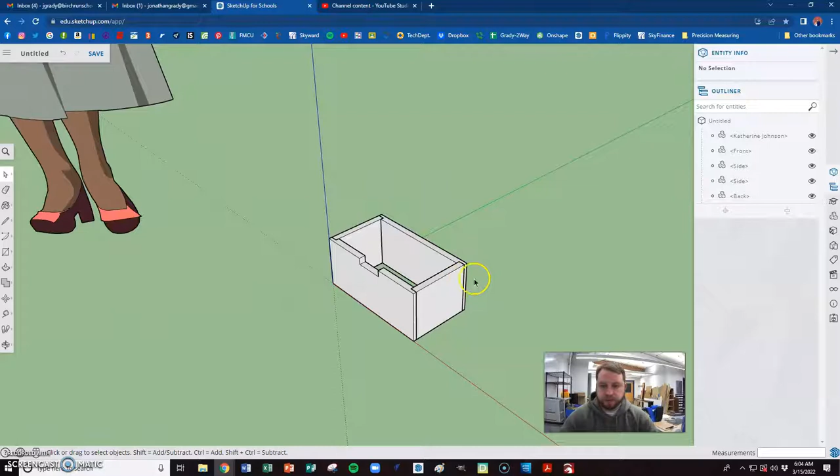Okay, we're back now, and here we're going to make the changes to the bottom. So we're back here with this drawing. If we go back, I lost my diagram, take a look at our diagram here. We're making the rabbet in the bottom of this.

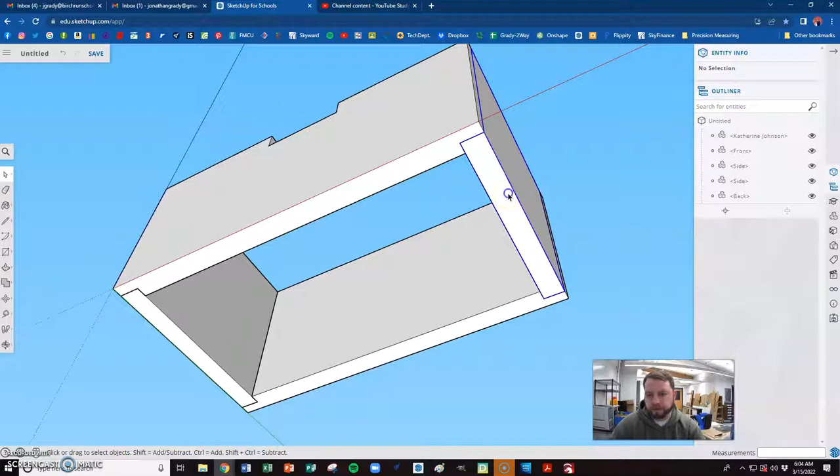So what we want to do is orient so we can see the bottom of our project. Let's start with the end first. It's pretty straightforward, and all we have to do, we know this is a 1/2 inch. I'm going to grab my line tool, hit L. Right at the half is where we want to be, so that's a 1/4 inch because we know that's a 1/2 inch thick.

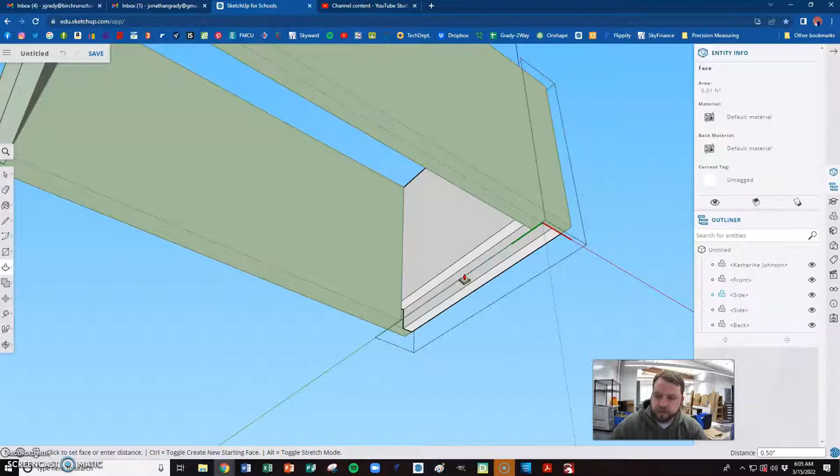So if I go to that midpoint and go down there to midpoint, now I've got that line. Okay, that's what we want. And then I'm going to hit push-pull on the inside half of that line, and then we want to take it up 0.5 inches. Now I can hit spacebar for the pointer tool and click out of that.

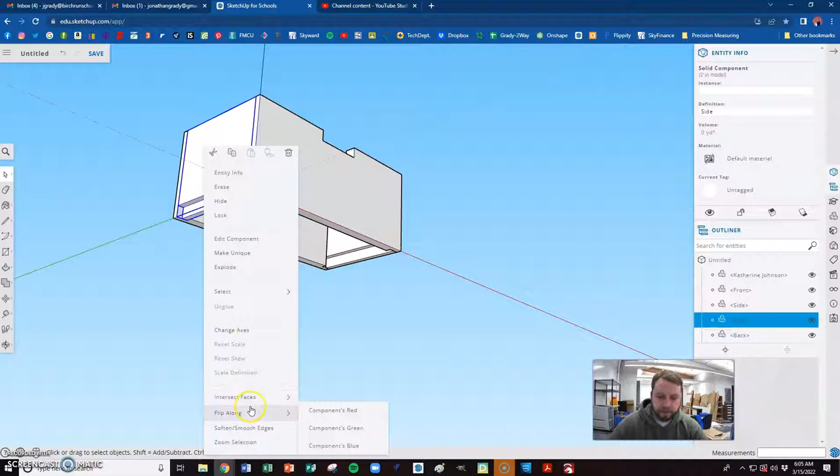You can see that this drew absolutely correct for this end, but then on this other side, it's the wrong way. So we're going to do the same thing we did before, that new little tool I taught you. We'll right click on that piece, and now we want to flip along the red line. Go down there, flip along red, and it turns it around real quick. Alright, so now our part is where we need to be for that.

And now the front gets a little bit easier now that we can see it. So we've got my pointer tool still, let's double click that. Oh, before I go any further, let's save.

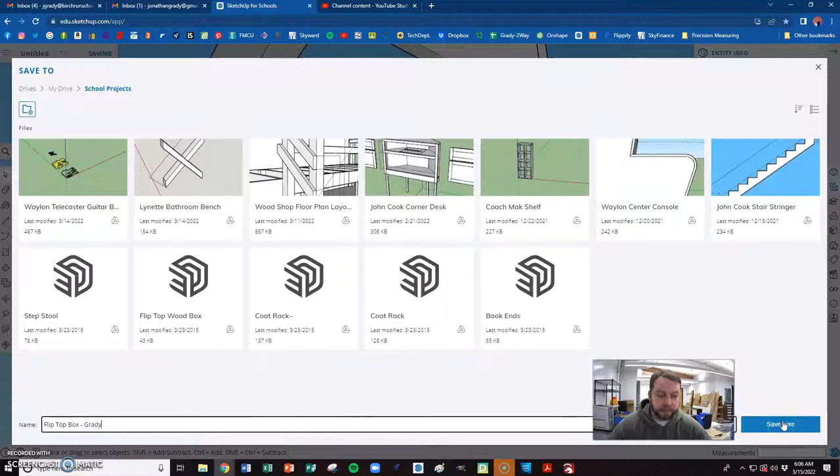All right, so now let's, with our pointer tool, double click to open the front. We're going to hit L for the line tool, and we're going to go right to that corner, corner to corner there. And so I know that that's at 1/4 inch because we already set that one, right? Now I hit P for push-pull, again on the inside half.

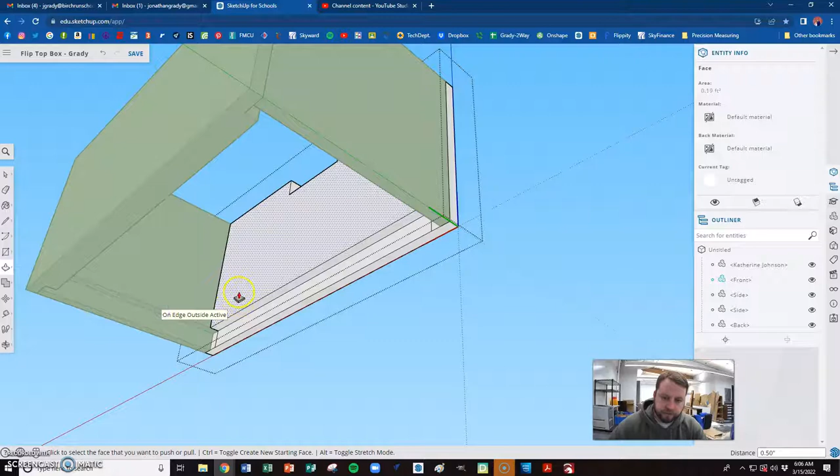You could type 0.5, or I could use this other lip that we created as a frame of reference. And so now we just have a couple things to clean up, and we are golden. I'm going to hit E for erase to get rid of that line and that line, heal that whole surface. Click on the pointer tool, click outside of it.

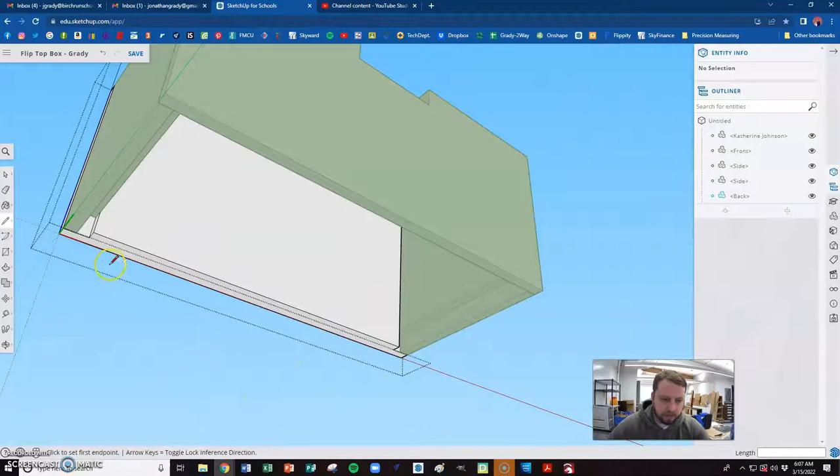And then we're going to repeat the same process on this one now. Double click it, hit L for line tool, corner to corner, push pull, take that up to there, hit E, boom, and boom. Alright, so now we have our rabbet done on the bottom, and we can draw our end right in there, we'll see if it lines up perfect. Or excuse me, our bottom.

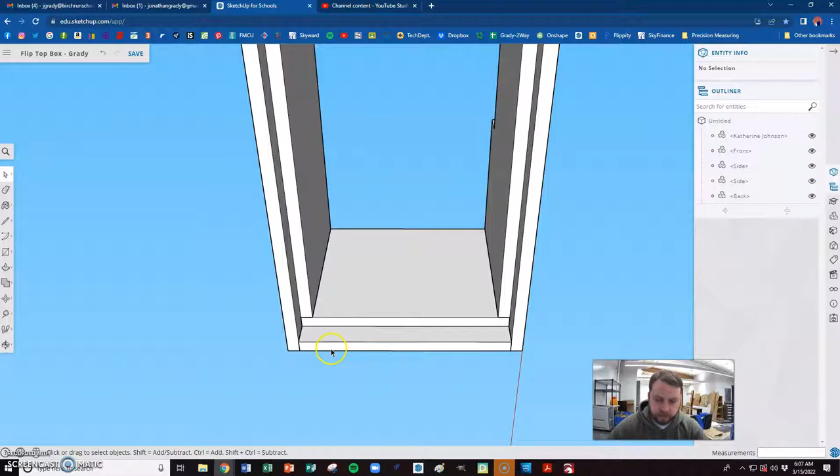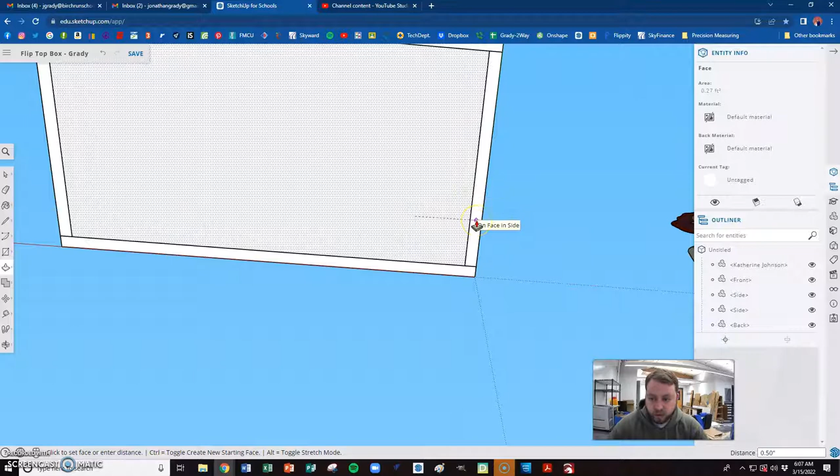So I hit R for rectangle, and I want to click right in that corner. Orient the camera so I can see this opposite corner over here. And 8.5 by 4.5, that's the dimensions we need to be. So I click again to close it. I hit P for push-pull, and I can just reference this edge over here, or I could type in 0.5 and enter. Either one's fine, I'm just going to do that.

Click the space bar for the pointer tool, triple click, right click, we're going to make that a component. Type bottom, and now our bottom is in there. Alright, we'll get spun around again.

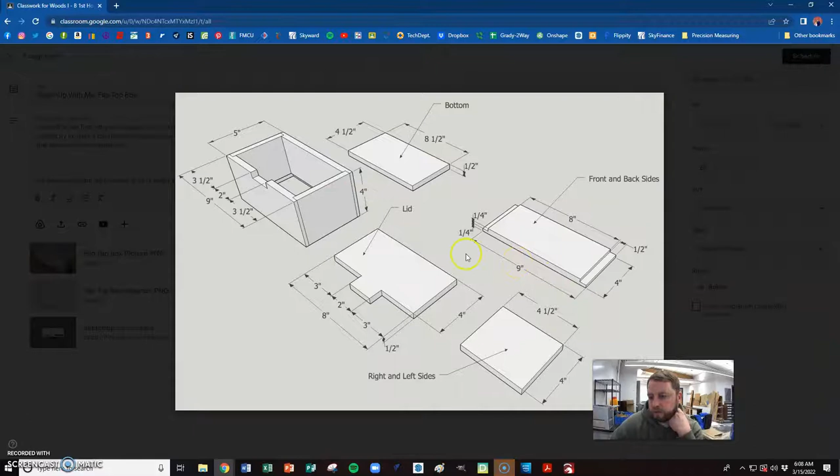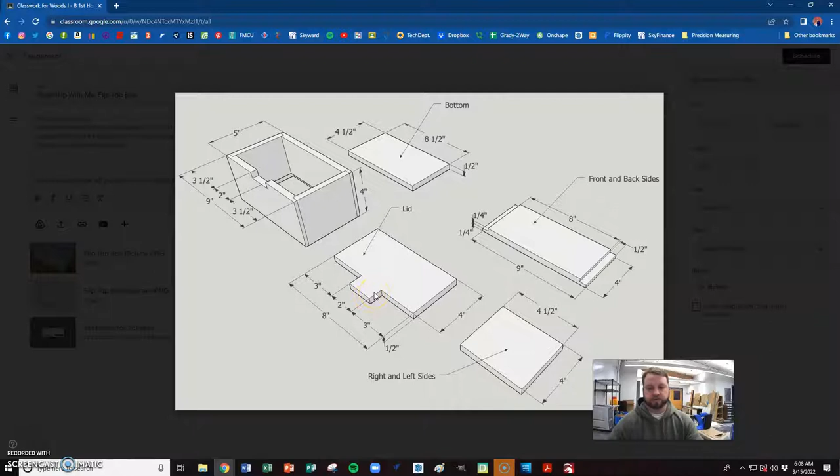Alright, let's go back and take a look at our dimensions here. And so now all I'm left with is this top. Okay, and when we get to the plan, we can talk about how we would create this using our machinery and whatnot, but for now we're just going to draw it. So it's going to be 4 this way, 8 that way, and then this tab we're going to make 1 full inch coming out, and then obviously 2 inches down. So for the most part, we're going to go 4 by 8 to get this main rectangle.

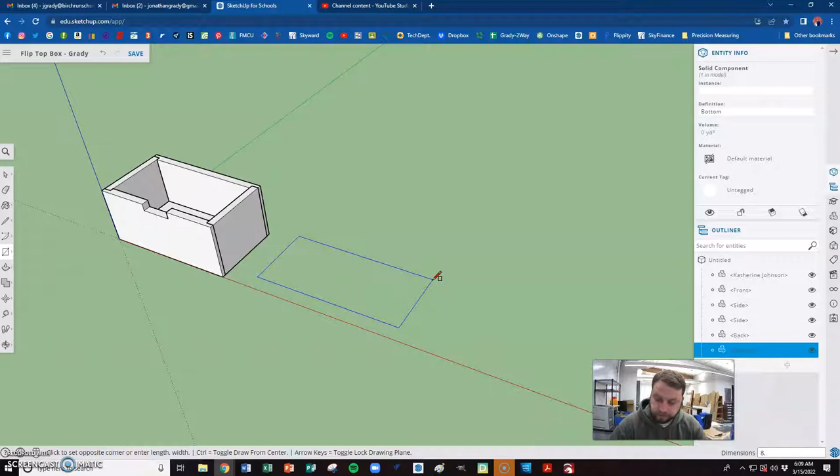So I'm going to draw that off to the side. I'm going to hit R for rectangle somewhere next to it, start pulling it out. I can see my long number is the first number. Okay, so that's going to be 8, comma, 4, enter. Let me double check those measurements. 8 by 4, yep. Alright, then I'm going to come back here and hit P. We're going to push pull that to a 1/2 inch, so I typed in 0.5 and enter.

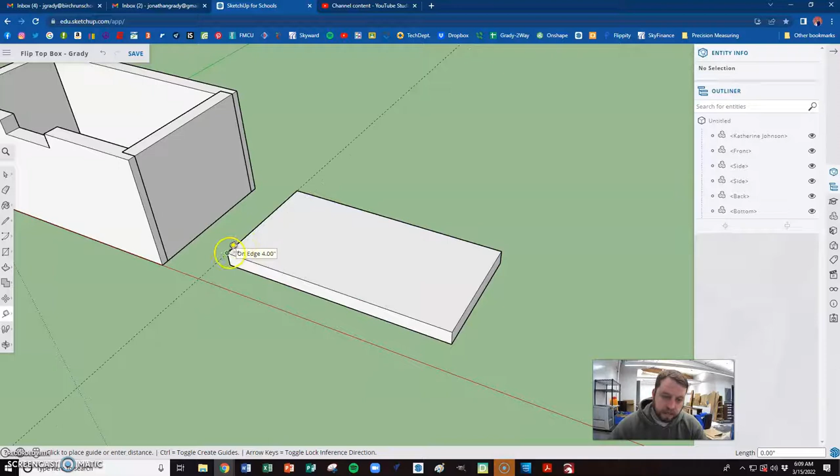And now we need to draw a rectangle in there that is going to be the tab. Alright, so let's go ahead and, I didn't click on the corner, I clicked on the edge. And then I want to bring this, I hit T for tape measure, I want to bring this line down.

Three, not 3.5, I think it's 3. Yeah, 3. Okay, and then if I bring this side down, 3. And then I just do this one to measure. I'm not going to actually close that. I'm just going to hit escape in the upper left-hand side to just double check my work.

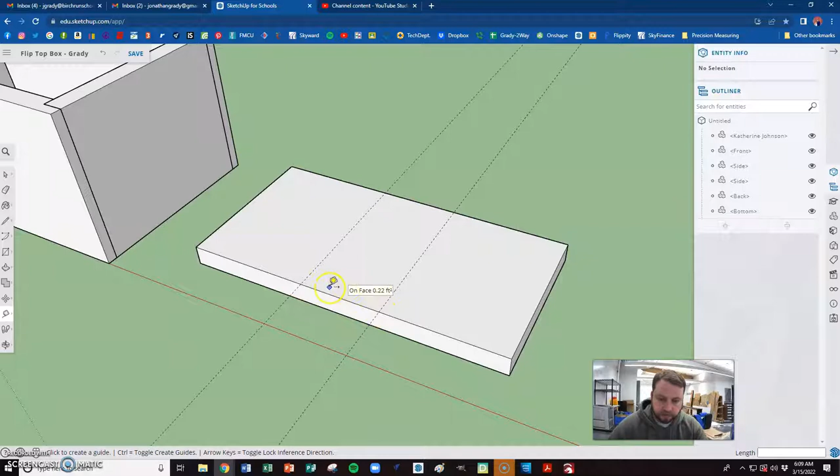Alright, so now we can draw a rectangle, hit R from that corner. I'm going to drag it down to there, so let it hover for a second so that it knows that's where I want it. And then I'm going to take it down. And it's not really recognizing like I want it to, so I'll just leave it right there and then I'm going to type it in.

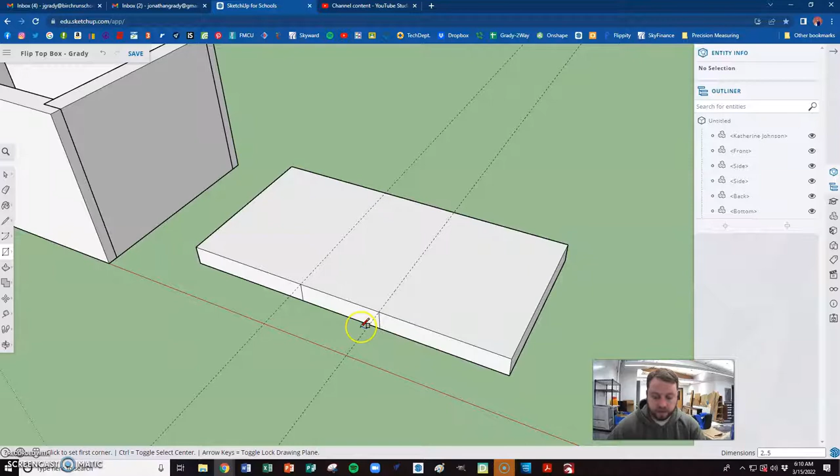2, 0.5, enter. Alright, I'm going to go to E, erase this, now I'm going to hit P for the push-pull, and we're going to bring this out 1 inch.

Now I'm going to hit spacebar for my pointer tool, and then I triple-click that, right-click it, make it a component, top, and now we've got our top, and I'm going to grab it right by here and move it.

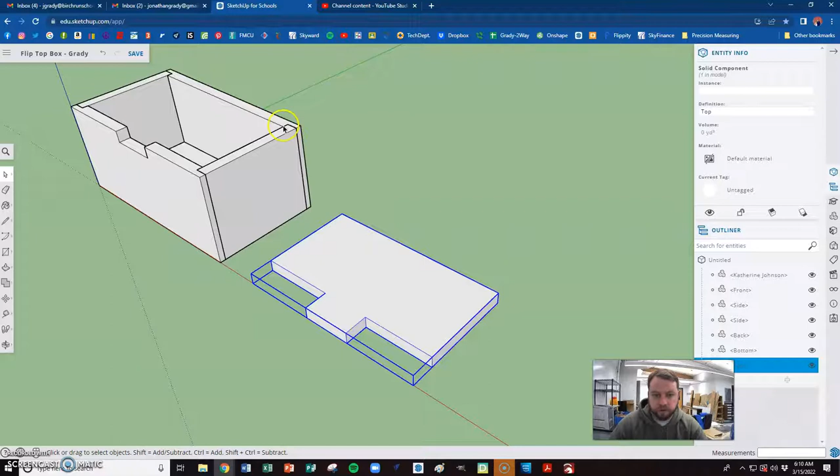Oh, that's not probably the best way. I'll grab it right by this corner here and move it right over here. So I'm going to grab it right there, move it right there, hit the space bar for the pointer tool, and now we are close to being done.

I want to add one more thing here. So let's, with our pointer tool, we're going to double click this. And this is something that we can do in our shop now. We have the capability of doing like some CNC engraving or laser burning if you wanted to put some writing on the top of this lid or on the front or whatever.

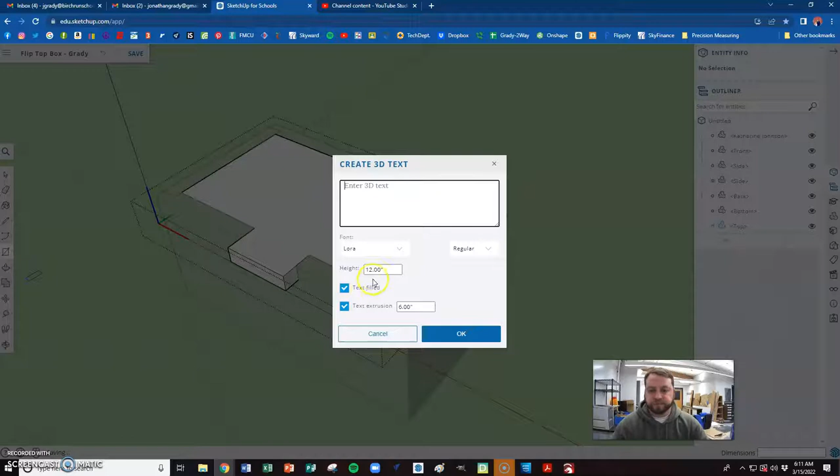But for us, what we're going to do is, if you click on the rectangle and get all these options over here, we want this one right here, 3D text. Alright, text filled, yes. Do we want to extrude it? No. Okay, our height, let's make it 1.5.

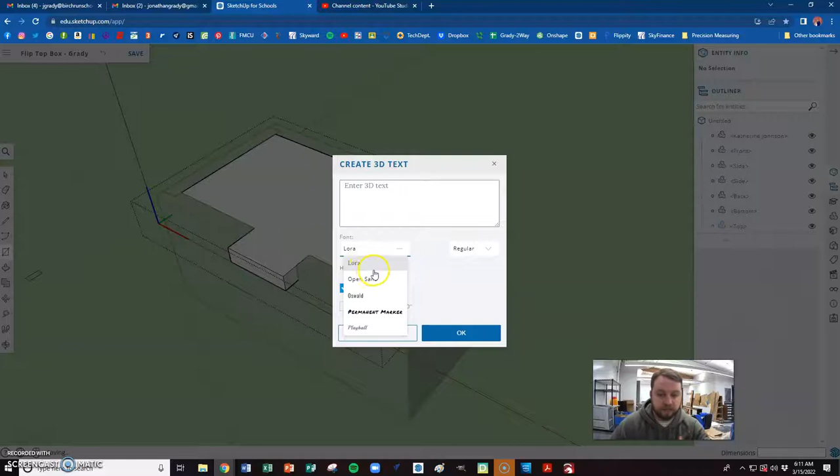Alright, and the font, you can pick whatever you want. Maybe yours has a lot of options, maybe it doesn't. That's totally up to you. But any font that works is perfect. We're going to hit OK.

Oh, I forgot to do that. I messed that up. Go back in here. Do all these settings. I forgot to actually enter my text. Put your last name, your full name, whatever you're comfortable with is totally fine with me. But put your name on it somewhere.

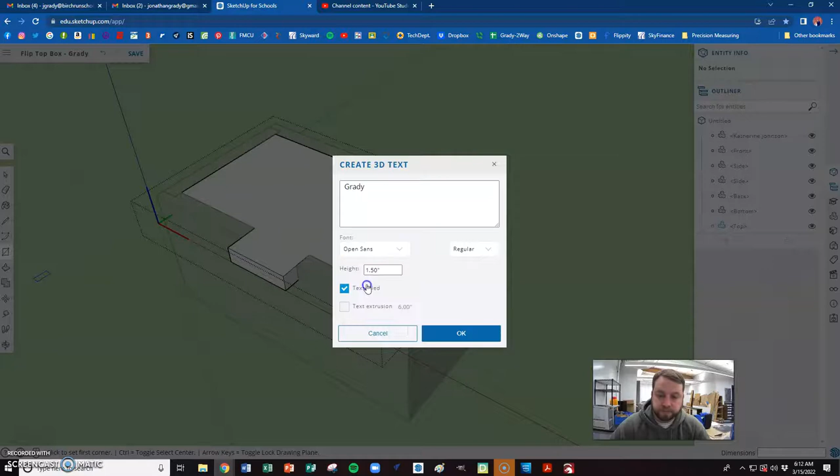There we go. And then I'm going to drag it. I'm not going to worry about making it too perfect in the middle. Okay, then I'm going to hit my space bar to get my pointer tool. Leave that on there. And then the last thing we do before we turn it in is we are going to throw some dimensions on.

So we're going to go show the dimension tool. Click on corner to corner. And we're going to go back to that corner again. We see that it's 9 by 5.

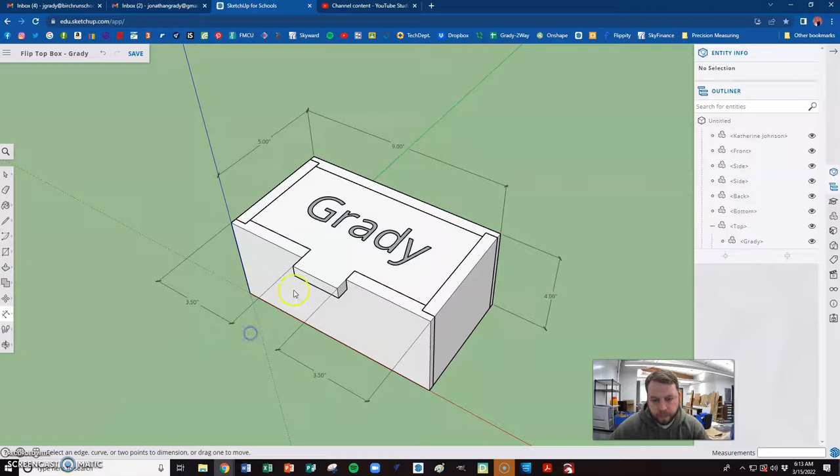Alright, and then let's just go to show our tab also. And I think that's plenty. So this will give me a chance to make sure that you did things correctly.

What I would like you to do for this is make sure that you have your outliner right here open so you see this. And so instead of going up here and turning it in this way, what we're going to actually do is take a screenshot on our computers. And so for my keyboard, yours might be a little bit different. We're going to hit Function F9 for me, and that just took a whole screenshot of this.

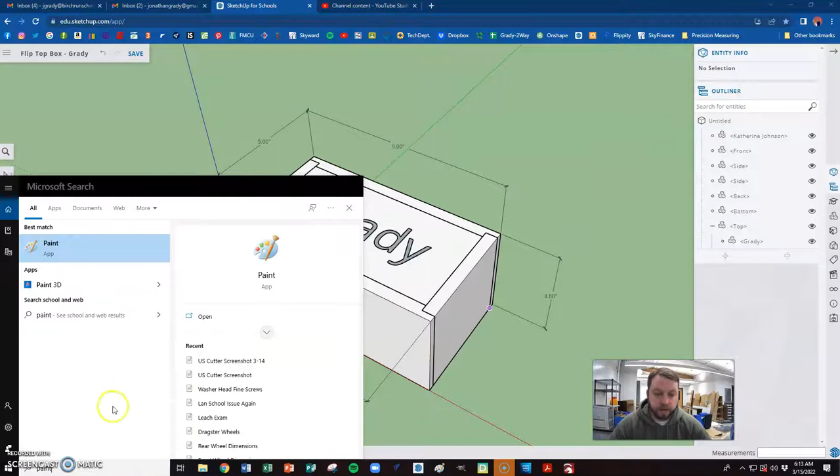And I'm going to go to Paint, bring that open, and then we're going to paste our screenshot in there. Now my screenshot shows my second screen, so I don't need that. So I'm going to cut that off, select this and crop. You don't have to do that cropping step. You should just have one screen.

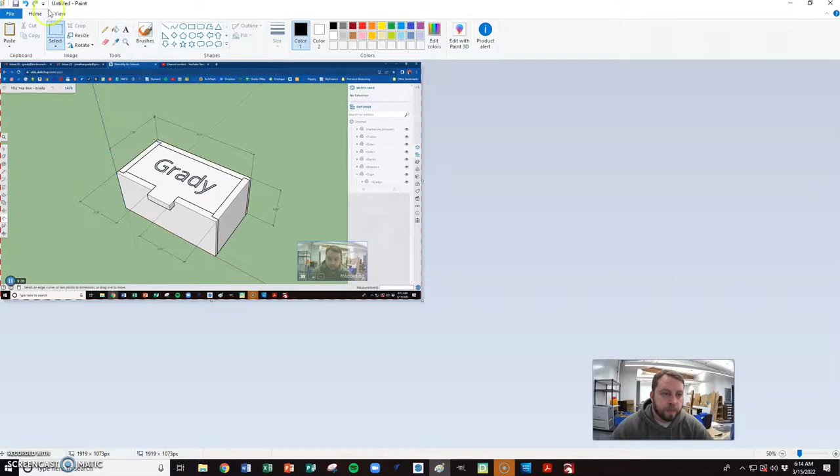File, save as, PNG is perfect. I'm going to put mine on my desktop. Flip, top, box, Grady. And you'll want to put your last name in there. Save it. And then that screenshot is what I would like you to turn in. So that way I'll be able to see your dimensions, your name, and that you made it components.

Okay? Now, worst case scenario, let's say you cannot figure out how to take a screenshot. Worst case, go up here and at least downloads, and not this one. You guys turn this one and this is wrong. You won't get points. The PNG file. Okay? And that will actually take a picture of your project.

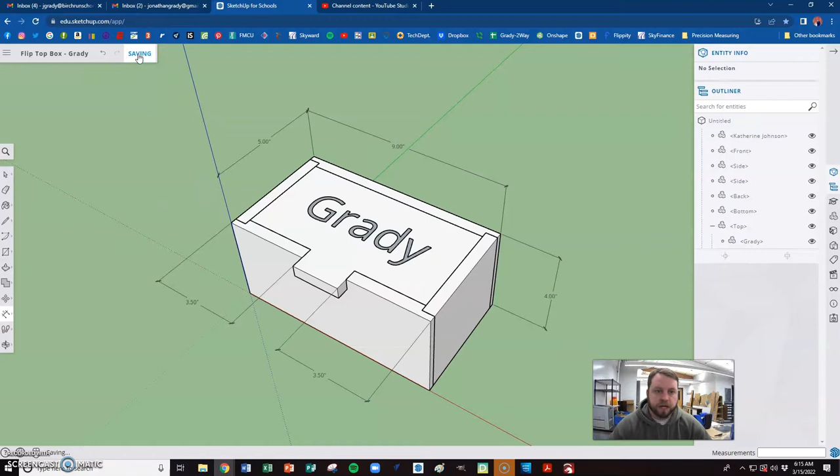It just won't have this over here. Okay? So this is the backup plan if you can't get the screenshot to work on your computer. Okay? And I'm going to save it before I'm done. And that is it. That's what I would like you to turn in for this drawing.